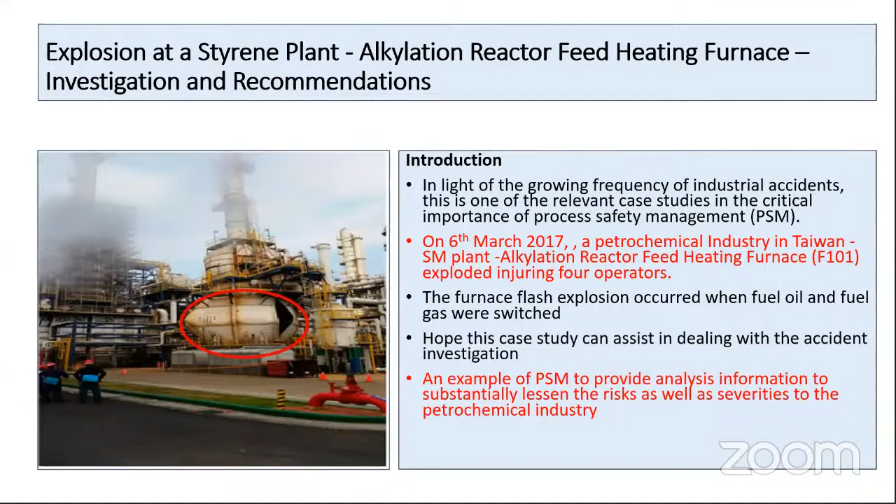Okay, going to the next slide. Process in brief. It is a petrochemical industry. I will go back to the first slide. In the light of growing frequency of industrial accidents, this is one of the relevant case studies in the critical importance of process safety management.

On 6th March 2017, a petrochemical industry in Taiwan, a styrene plant, styrene monomer plant, had its alkylation reactor feed heating furnace explode, injuring 4 operators. The furnace flash explosion occurred when the fuel oil was exchanged with fuel gas, that is, they were switched. Hope this case study can assist in dealing with accident investigation also. It is an example of PSM, to provide analysis information to substantially lessen the risks as well as the severities to petrochemical industries.

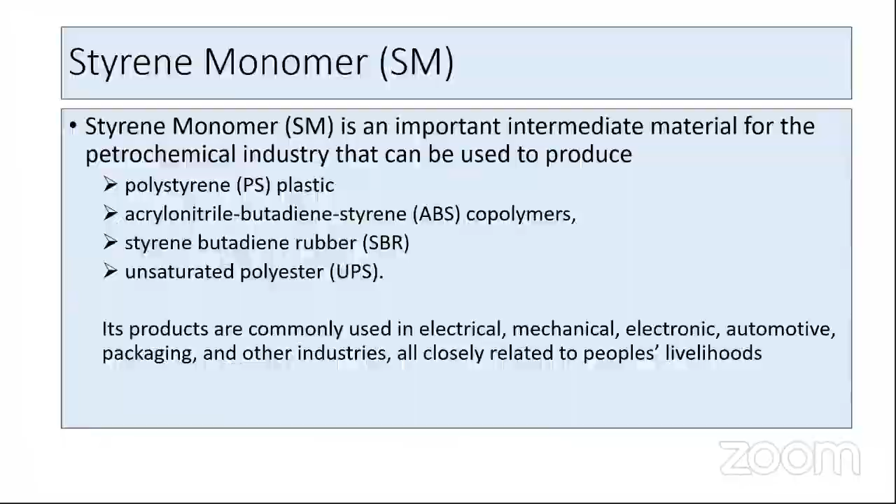Going back to the third slide, fourth slide sir, sorry. Process in brief. Is everybody with me? Yeah. In general, the styrene monomer manufacturing method is based on alkylation of benzene and ethylene.

You can see in this figure, at the bottom right side, there is a reaction between ethylene and benzene. Ethylene on the left extreme and benzene on the right top extreme, they both react in the alkylation reactor to give ethyl benzene. According to the process flow chart, before the raw materials ethylene and benzene enter the alkylation reactor, only benzene must be heated to reach the operating temperature of 700 to 800 degrees or even higher in the feed heating furnace, and then fed to the reactor where ethyl benzene is formed.

That is, ethylene from the left extreme goes to the alkylation reactor, wherein also the benzene is coming to the feed heating furnace. Before coming to the feed heating furnace, it is heated. The heated benzene only can undergo alkylation with ethylene, at around 700 to 800 degrees centigrade. So it is heated in the feed heating furnace, and then fed to the alkylation reactor where ethylene reacts, and it gives ethyl benzene.

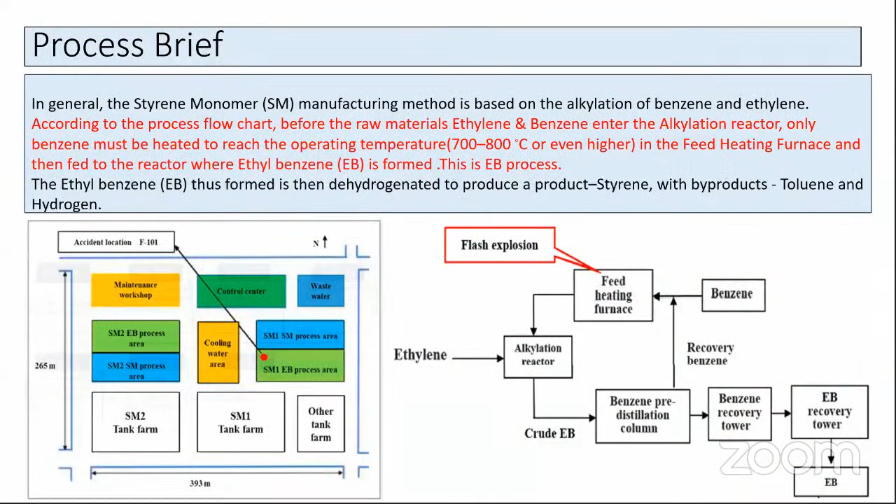So next slide. Accident scene photos. You can see this shell of the furnace cracked. Heating furnace, numbered F101, has been cracked. Next one.

Accident investigation. Some indirect possible reasons are as follows. After the heating furnace explosion, the operator did not shut down F101, the heating furnace, according to the standard operating procedure. Then the atomization of fuel and gas continued in the furnace, resulting in flashover under high temperature.

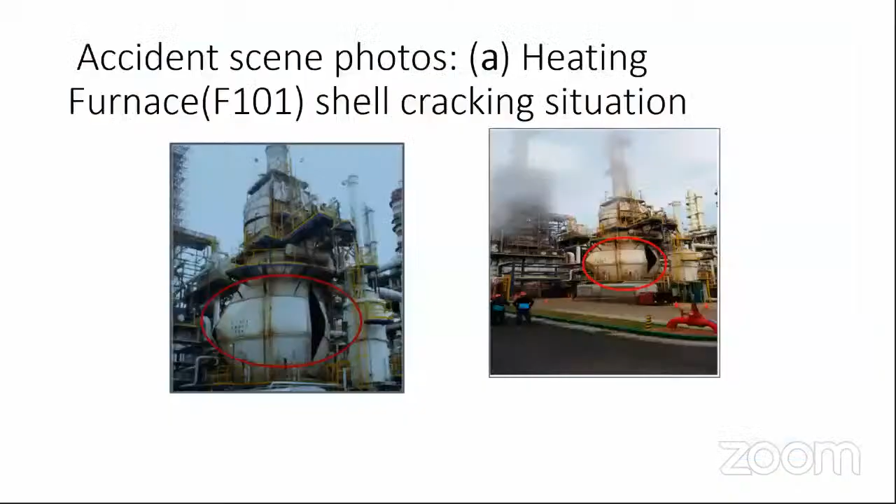I want to explain here. He did not shut down the heating furnace and atomization of the fuel. The fuel was in continuous operation, continuous running, and the furnace was already under heat.

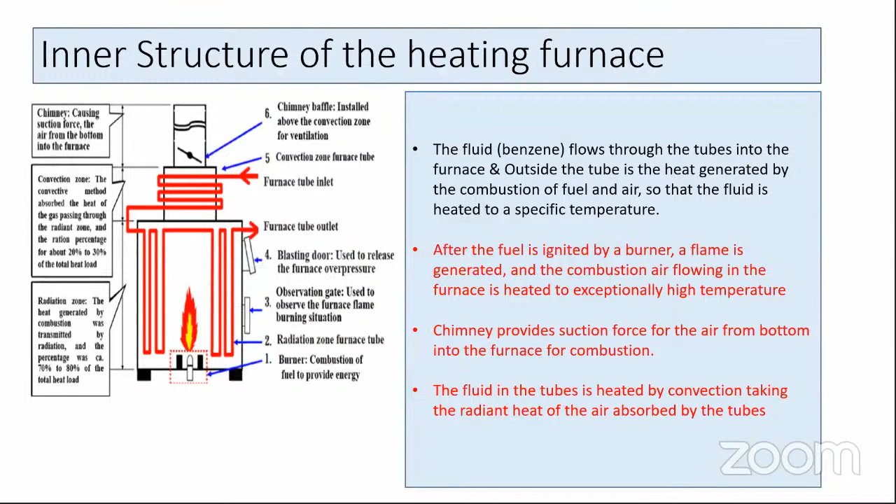During this, I will tell you one thing. From running condition, fuel oil was initially used, and in the running condition itself, he switched over to fuel gas. During this process, while he was using fuel oil, already the furnace surface temperature was very high. Now he switched out to fuel gas.

So the fuel gas is coming from the burner, which was extinguished, or the flame which was extinguished. We have three elements now: the gas coming from the burner nozzle, the heat surface, and the air rushing up because the chimney is open. So we have three elements now coming into the furnace. I'll just read it, and it is enough to cause fire because the concentration is quite enough.

In the fuel adjusting period, the furnace produced black smoke. At this point, on-site staff discovered the flame extinguished and performed the adjustment. Then determined the fuel gasification, meaning fuel is coming, caused the ignition, resulting in other burners' flames extinguishing instantly.

The on-site response time during the abnormal situation was too short, because with the explosion, generally on-site we cannot control the situation. On-site response time was very short, too short.

The blast door vent size was not meeting the requirements. I've shown in the chimney structure that the blast door vent size was not enough to meet the requirements. The pressure will build up and should be vented, and the chimney's nearest opening is the blast door, which can release the pressure. But it was not enough. Since the chimney was opened, it took that route, and the pressure increased and it blasted.

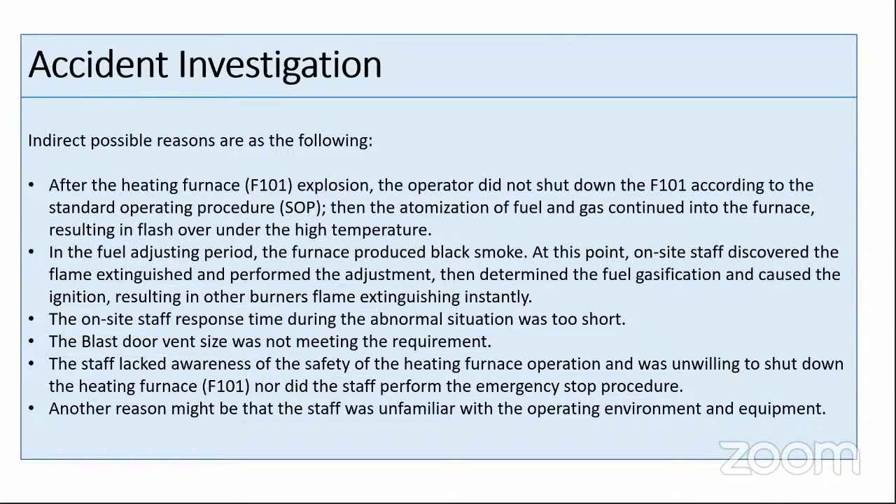Okay, next slide. Accident investigation analysis. We have taken just now an analysis. We have many methods of analysis. Here we have a picture of how accident identification works, so we can identify the cause of accident, and the assessment, control and decision making, like qualitative analysis. The entire thing is a qualitative analysis system, and for risk analysis we have hazard identification.

For hazard identification we can use ALOHA and FTA. ALOHA is software for consequential modeling, and FTA, root cause analysis, is a top-down approach. We can have that also.

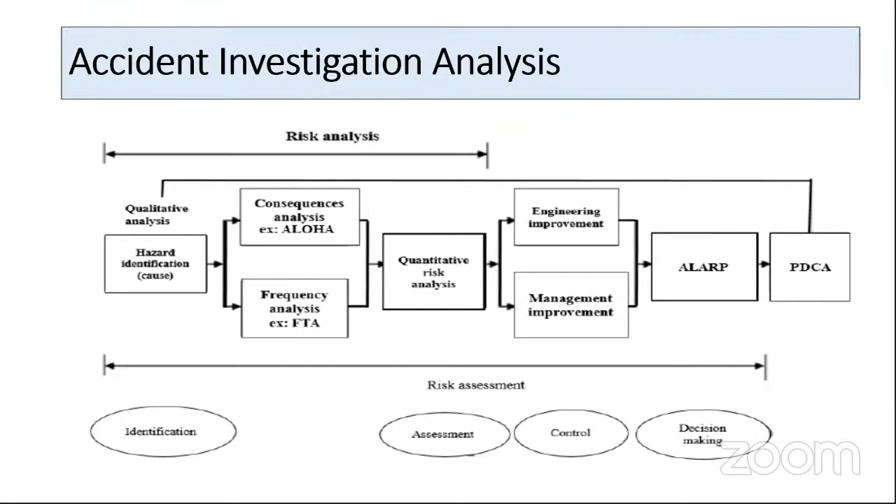And quantitative risk analysis - from hazard identification we can quantify the risks, and we have control systems, engineering controls and management controls. We have decision making, ALARP. Since we go through controls we can get to ALARP, and we have the PDCA cycle: plan, do, check and act. We have the decision making. Next slide, sir.

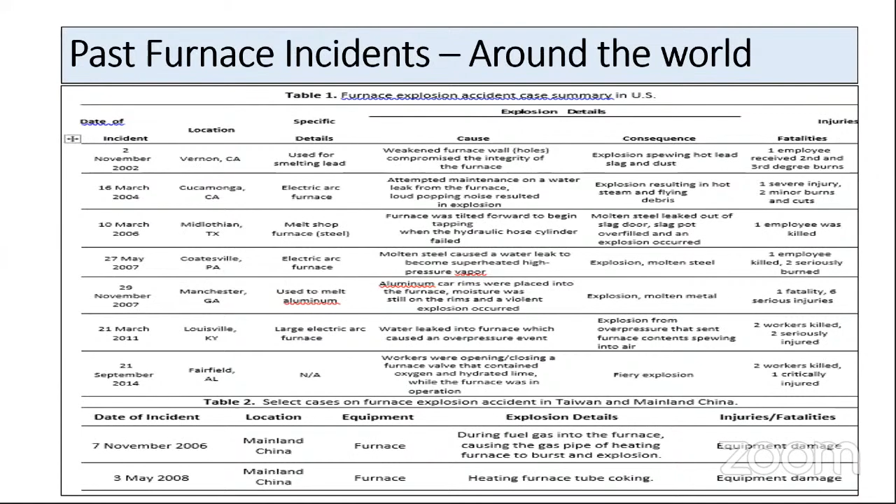I can discuss in the next slide about the causes. It is recognized that accidents of the heating furnace occur intermittently, and common accidents mainly include furnace explosion, coking in furnace, and explosion in the flue.

Causes of accidents: high pressure within the system, human error, improper maintenance or faulty design, or equipment failure.

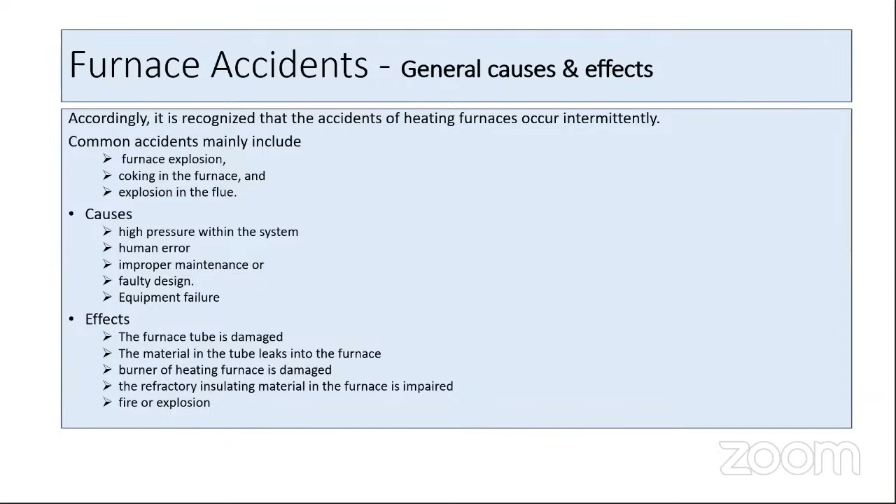Effects: the furnace tube is damaged, the material in the tube leaks into the furnace, the burner of the heating furnace is damaged, refractory insulating material in the furnace is impaired, and fire and explosion occur.

We have used the concept of hazard identification, risk analysis, risk control, and decision making. In hazard identification we already discussed ALOHA and FTA. In risk analysis, qualitative and quantitative methods are used to implement risk assessment, and for risk control we have engineering and management plans leading to decision making.

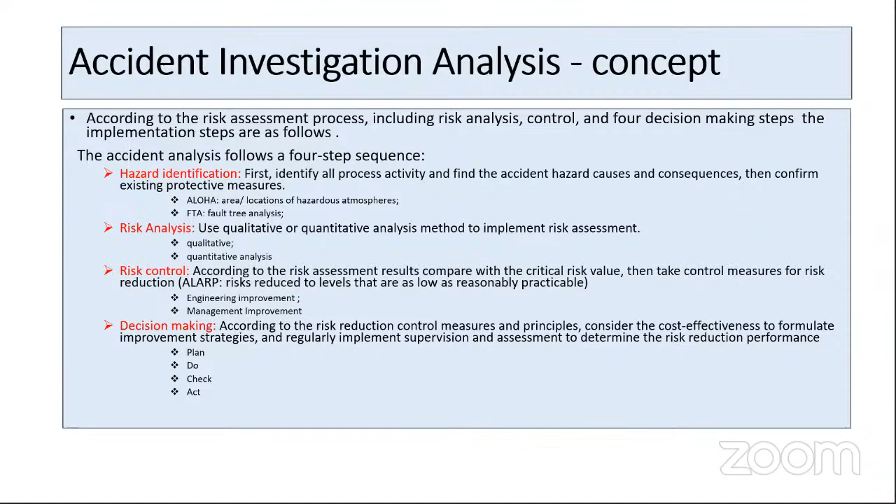For accident investigation analysis, we have Process Hazard Analysis (PHA) elements under PSM. One method is FTA - Fault Tree Analysis, which uses what-if analysis and event tree concepts.

Fault tree analysis was developed by Watson and Mearns at Bell Telephone Laboratories in 1962 in the area of the American telecommunication industry. It was first applied in the aircraft industry for missile failure analysis by the USA, and later NASA, other electronic industries, and software companies also started using it for safety analysis.

FTA is an effective tool widely used to find system reliability, maintainability, failure probability, failure rate and repair rate, and for system safety analysis.

FTA is a top-down approach starting with an undesirable event. You can see in the figure the top event - here, an explosion occurred in the heating furnace. That is the top-down undesirable top event. Below it come the intermediate events, or possible sources.

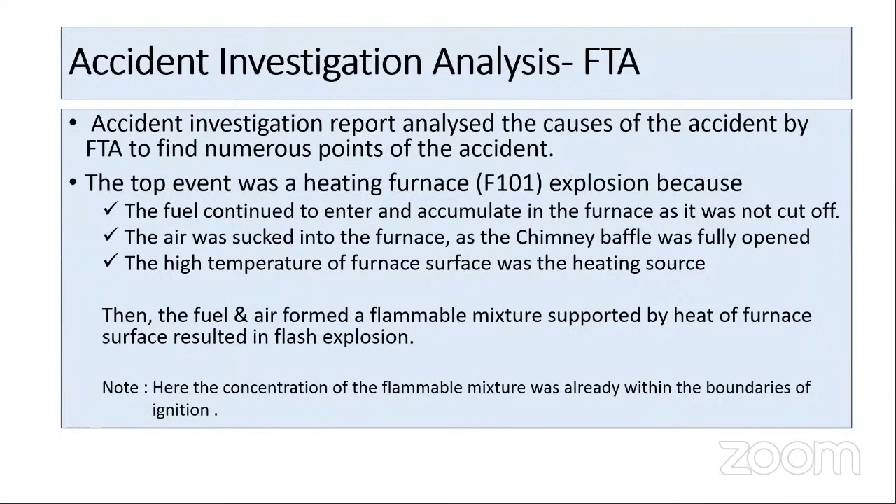See, we have this fault tree. This is taking the heating source, heat, furnace explosion. We have three things here: heating source, air, and excessive combustible materials. So we can draw our fault tree in this manner. We can give names like T is our top event, X1 is X1, X2, X3 are the intermediate events, X4, X5 — all these things I have just given as labels.

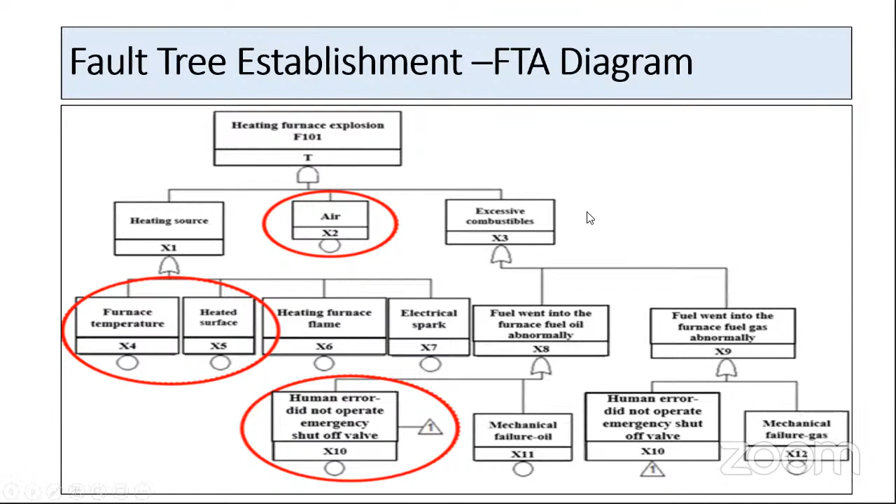Using the basic fire triangle, we have flame, ignition source, oxygen, and fuel. Applying this same principle, we have developed heating elements — heating elements which are furnace temperature. X1 is the heating source, and X4, X5, X6, X7 are the heating sources: furnace temperature, heat surface, heating furnace flame, electric spark. We have taken some possible causes.

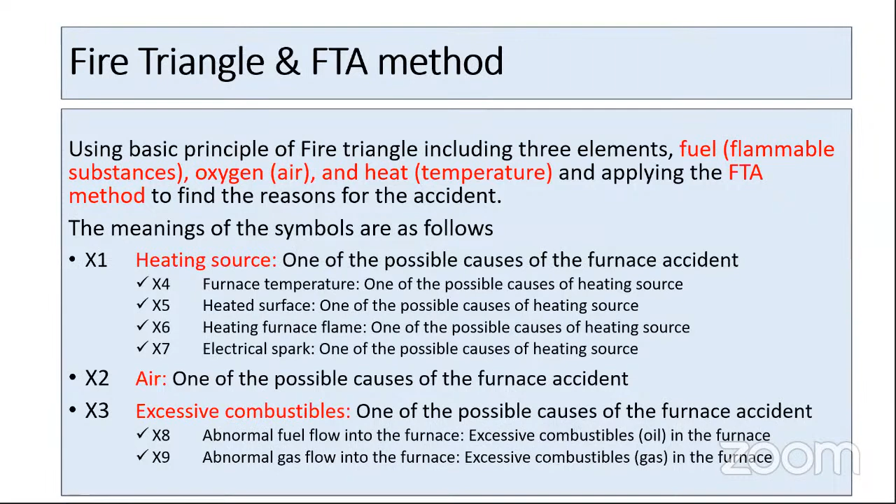X2 is air, X3 is excessive combustibles. So under that, other causes are abnormal fuel flow and abnormal gas flow to the furnace. Next slide, next slide.

X10 is the human error, which is also a possible cause — did not operate emergency. X11 is mechanical failure due to oil. X12 is mechanical failure due to gas. T is the heating furnace explosion, that is the undesired event. So we can see intermediate events and basic events classified under this. So whatever failure, these are the failure events — the intermediate failure events and the basic failure events. So causes, failure causes, or events are one and the same.

So we will form a fault tree, and then we will form some equations. T is equal to X1 — you have seen X1 is the heating source. X2 is the air, and X3 is the excessive combustible.

So we go to the top event, the top undesirable event. We can multiply the probabilities X1, X2, and X3. Then X1 — you can see the basic causes of X1 are X4, X5, X6, and X7. X2 is already air. And X8 and X9 are the excessive combustibles, so instead of X3, we have taken X8 plus X9.

Then T2 can be further classified like this. X2 we have taken on the left, and X4, X5, X6, X7, and X10 we have taken. Now this is taking failures into consideration. We can take two ways: one is air, fuel, and heating sources, or air, fuel, and human errors. We can get the top-down approach either this way or that way.

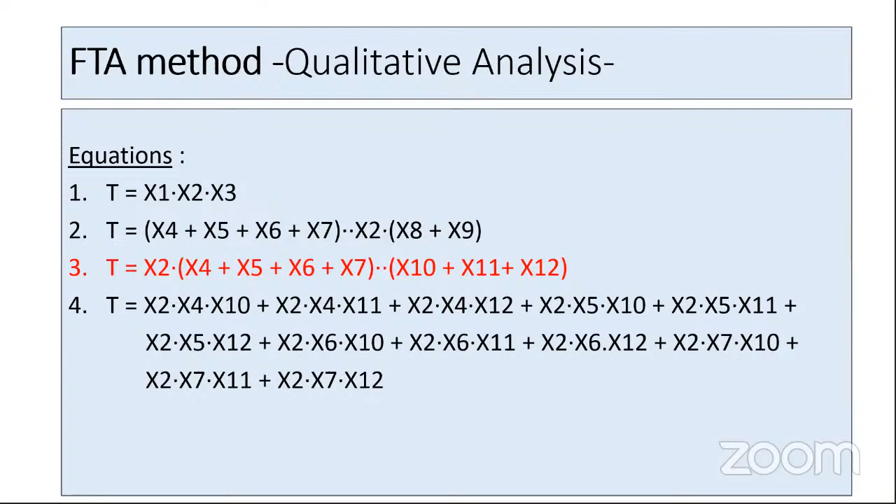So we have taken two equations, 2 and 3, just to remember. And if you multiply all the elements one by one, you get this big equation. Next slide — each element multiplied to each other gives equation 4.

Next slide. So we also have minimum cut sets — this is another method. A minimum cut set is a combination of basic events which could lead to the top event occurring. It cannot be simplified further and still ensure occurrence of the top event. If the MCS is in a failed state, the entire system is out of order.

So like that, in every set we have air — air, heating source, and human error. This is a combination of all these key factors. Now, from the above results, we could find the key factors of the top event are air, any heating source, and human error or mechanical failure.

So in general, an MCS containing only one basic event is likely to cause failure more readily. A minimum cut set with only one basic event will lead to system failure more than an MCS containing two basic events. So if it has more basic events like X2, X4, X10, the chance of explosion will be less.

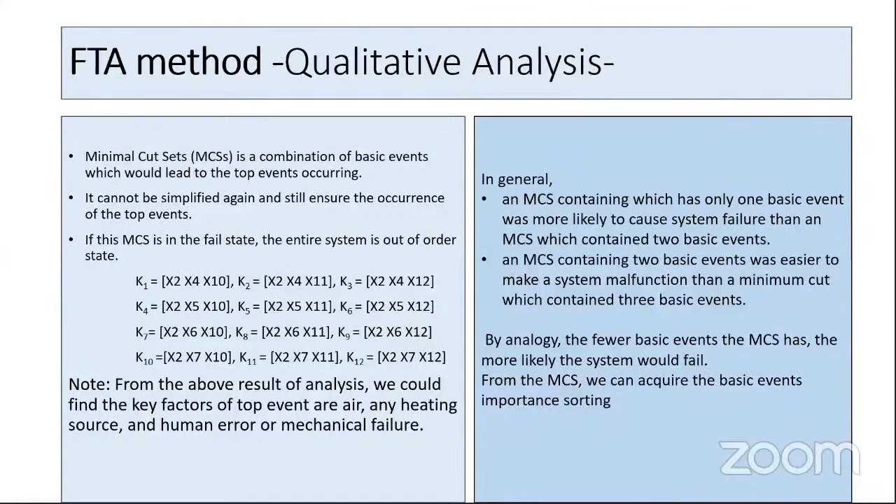But if you have a single basic event, the system failure will be more likely. So an MCS containing two basic events is easier to cause malfunction than one containing three basic events — one basic event causes system failure, two basic events cause malfunction, and so on. So minimum basic events mean less impact, less explosions, less accidents. Next slide, this is a minimum.

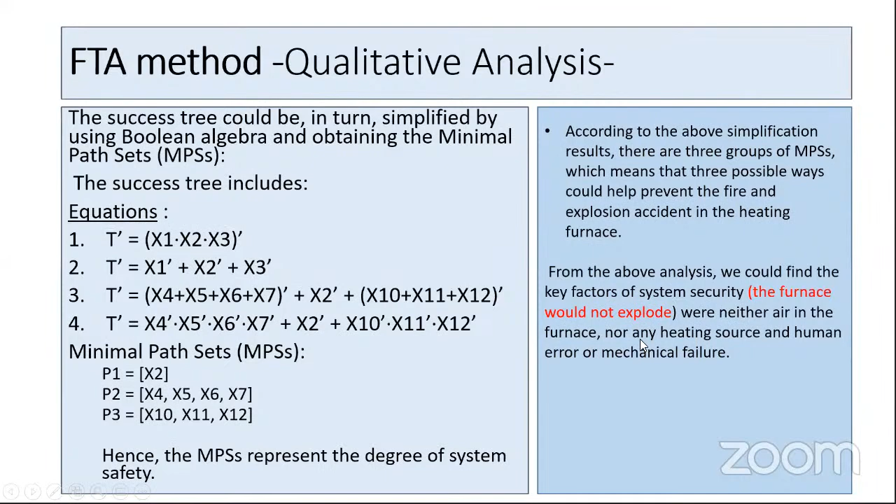Minimum path sets the success rate. This is another MPS method. It is like, if it has a minimum pathway, the furnace will not explode. So if you got a minimum pathway that will not explode, it can be explained now.

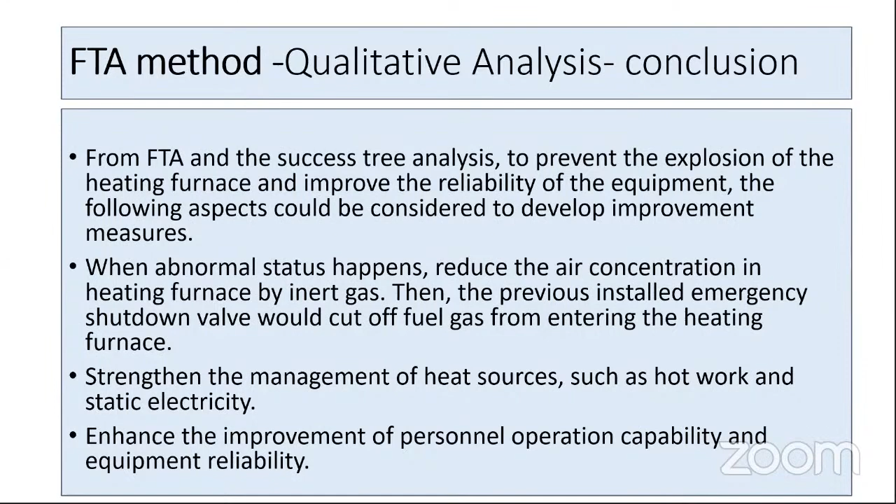We have Aloha also, so we can see the minimum. Aloha is a consequence modeling used to analyze the distance where more impact of explosion can occur. So, next slide.

I think you got to see the resultant analysis. We have learned from this that the fault was caused by high temperature. The explosion occurred due to high temperature sources, mixed flammable gases, and human factors. Human factors are misoperation, misjudgment, unmoved action, lack of training, lack of skill, and so on.

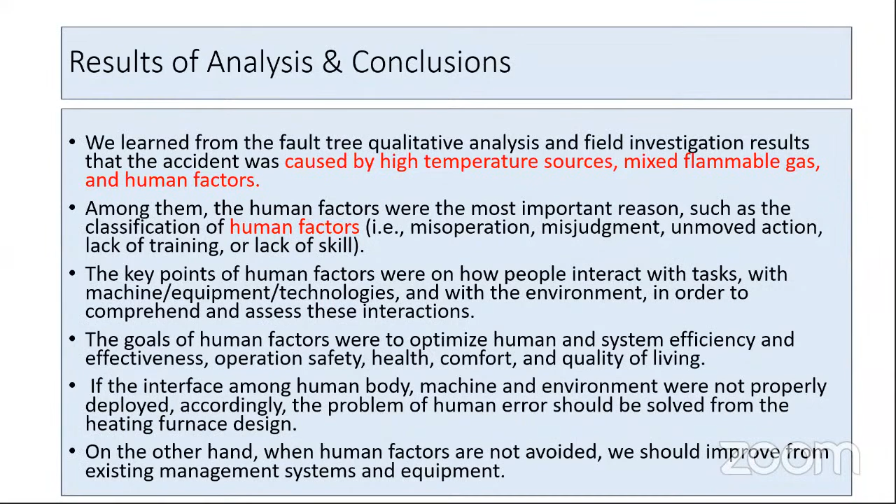So we'll quickly go to the recommendations. The first, units with FTA cost-effective analysis. Through this FTA cost-effective analysis and investigation of the incident, the following recommendations are written.

Units with different specializations must cooperate with each other to investigate accidents and improve the operating safety of the equipment. Inherently safer design and mechanical integrity could be improved. We need to develop procedures of MOC, management of change.

When the heating furnace used different fuels, they should develop MOC procedures to avoid increasing the risk of exchanging fuel. We must use a single fuel instead of multiple fuels.

Operator's ability should be improved, especially during abnormal heating situations, to improve operator training and equipment regular maintenance. Before the heating furnace was opened, PSSR should be done for F101.

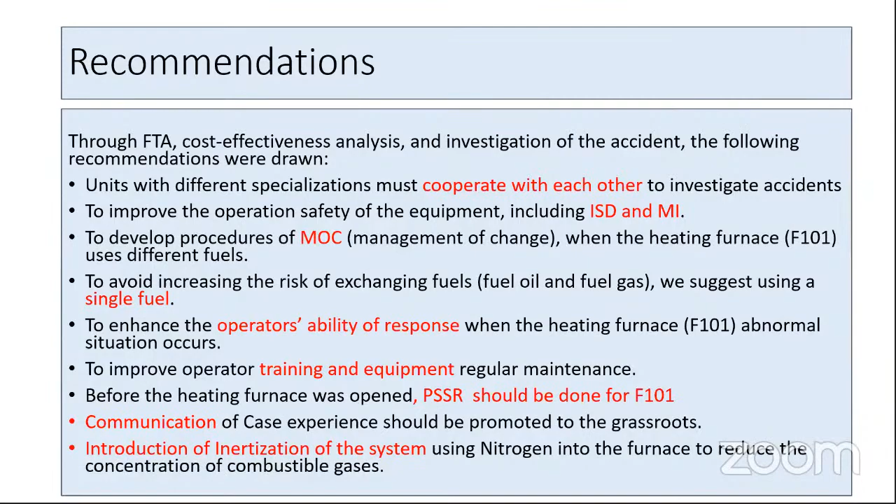Communication of the case experience should be promoted to the grassroots level of every person. Introduction of inertization of the system using nitrogen and other inert gases into the furnace to reduce the concentration of combustible gases. Thank you, sir.

It was a little lengthy. Sorry. Thank you very much, sir, for providing this opportunity.

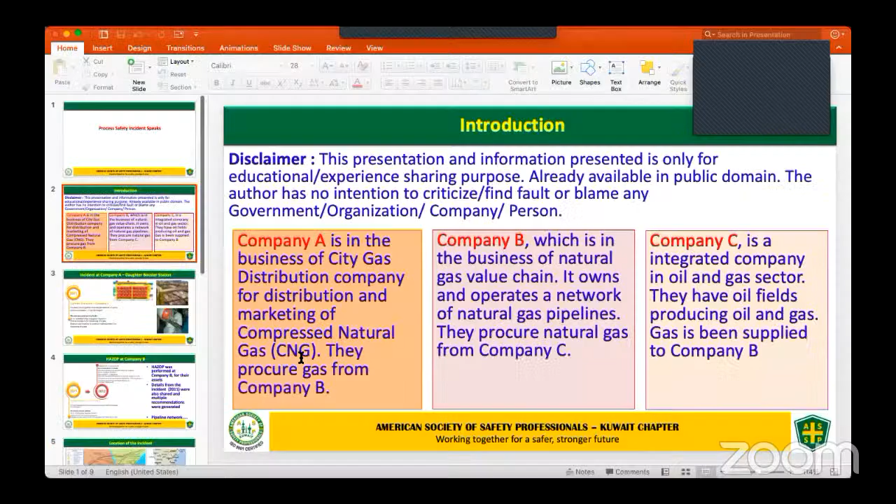Yeah, just give me a second. I think I just shut it down. It's a glitch. Just give me a second, sir.

Good evening, my name is Sridhar, and I hope you are able to listen to me? Yes, sir, yes, sir, carry on.

Wonderful. So what I'm trying to give is an experience which I had when I was working as a consultant. So it's actually about two different incidents, but they're all interrelated, and I'd just like to share about how things are.

The first and foremost thing is this presentation and information which is being presented is only for the purpose of education and experience sharing. So I don't want to quote anything, or say anything otherwise. This is not a place where I'm trying to blame anyone or any organization per se.

So let's look at it as three different companies. One is company A, which is in the business of a city gas distribution company marketing CNG, and they are selling it out in southern India. Company B is in the business of natural gas value chain, it owns and operates a large network of pipelines and its associated assets. Company C is an integrated oil company with oil fields, and from there they are supplying the gas to company B, which goes back to company A.

So this is an incident which happened in company A. There was a cylinder explosion. These cylinders were used as a part of the value chain where CNG is being filled up, and it is being sent out to other places where they use these CNGs to be filled up in CNG filling stations for vehicles, cars, and autos.

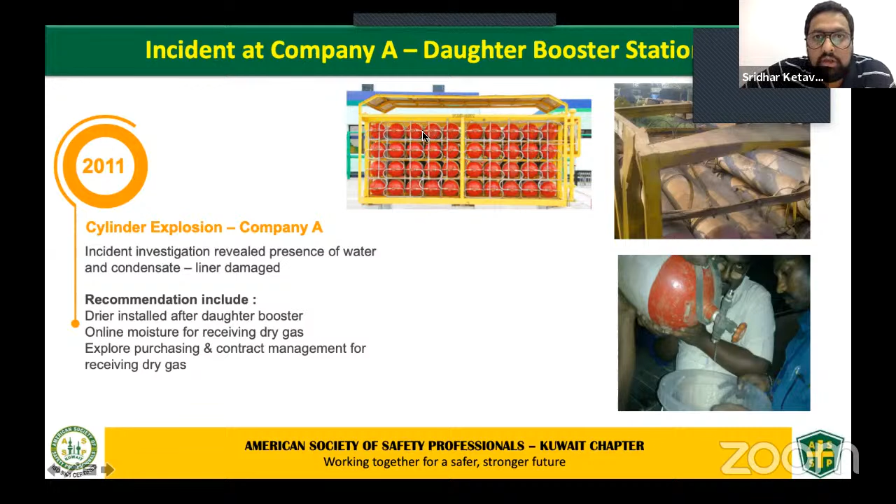So you're able to see the cylinders which are stacked. Can I just have a feedback, please? Yes, you could see, yeah, perfect. So these cylinders are basically the banks. When we have cylinder banks, you have the high bank and a low bank. This is exactly from the company's website which I had taken, so you can see that.

On the right side, you can see that one of the cylinders had an explosion, and the top part of the beam was also damaged, and it flew up for some height, and then it just fell off. So then we were called in for doing an incident investigation.

So during the incident investigation, we found that... anything? I'm sorry. Yeah, so anyhow, when we were trying to do the incident investigation, we found that there's a lot of condensate and water in the cylinders, which has been depicted in the other photo which is there.

Eventually, the recommendations which came out were to install a dryer after the daughter booster. So the gas comes in from the booster station, and then there's a daughter booster which increases the pressure of the compressed natural gas, and then we wanted to have a dryer. We also suggested an online moisture monitor for the receiving of dry gas, and to explore purchasing and contract management, because company A was always telling that company B is giving us wet gas. This is an incident which happened in 2011.

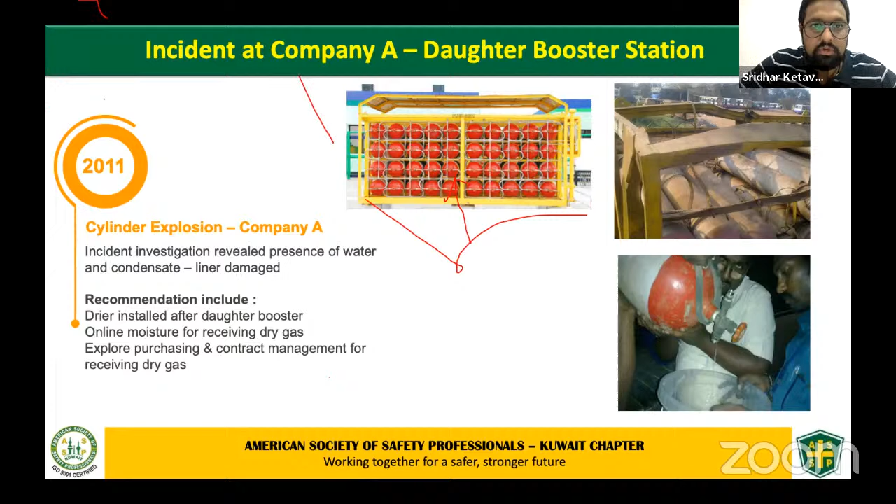Following that, what happened was, we went to do a Hazop for company B. So company B, actually, when we were doing Hazop, that was in 2012, where we performed it for their entire assets. During the Hazop, I had actually shared, because I was the chairman for the Hazop, the information about what happened in 2011, for company B.

And eventually what happened is we came out with Hazop recommendations: to enhance the separation system at the company or supplier, have an online analyzer, develop SOPs for some items, consider frequency of periodic inspection and maintenance to ensure operability of the equipment, and ensure corrosion monitoring is also there.

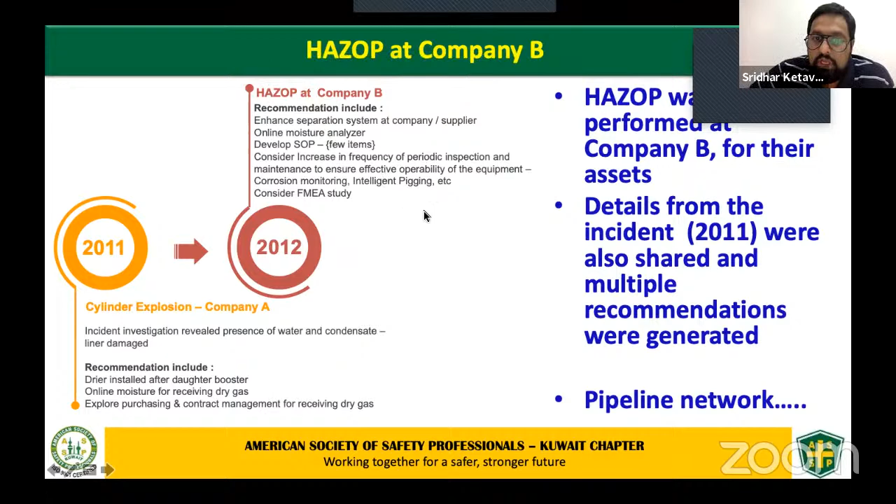So what happened in 2014 was there was a major incident with an underground pipeline for company B, and there were about 23 fatalities and around 38 injuries. There was a significant amount of asset damage. Following such an incident, obviously government intervention comes up, and the government started to investigate the issue.

I'll just play you a small video so that you can understand it a little better.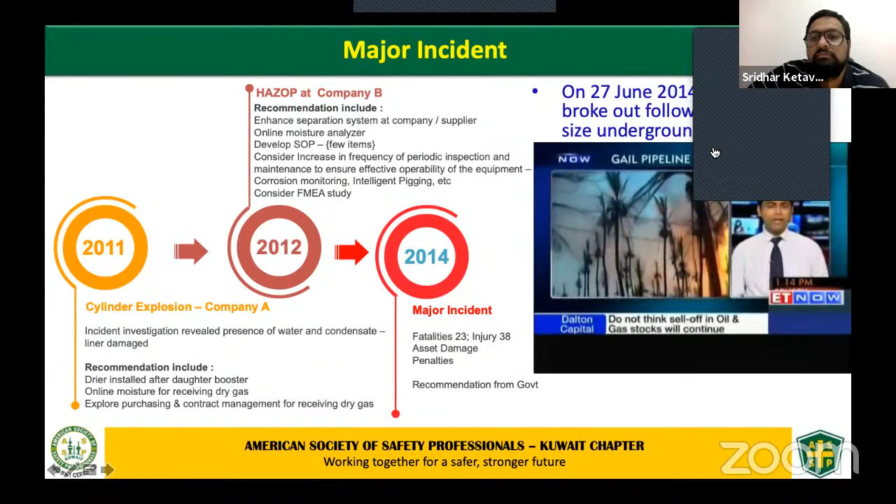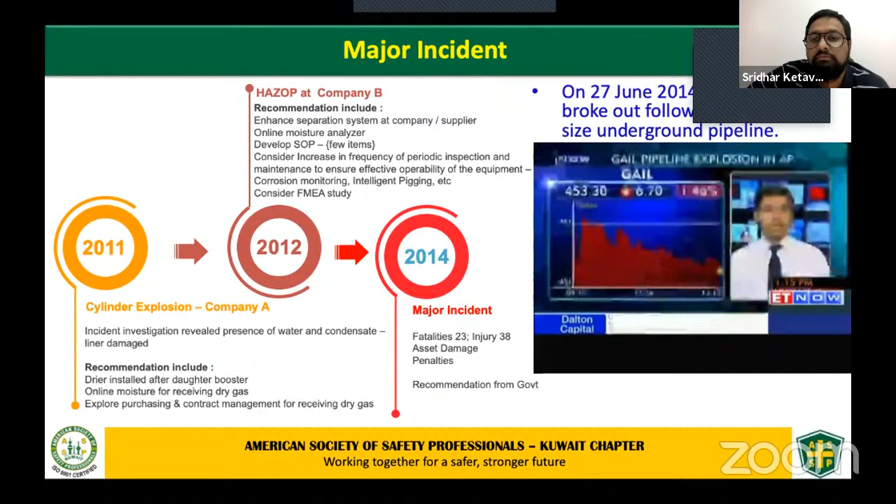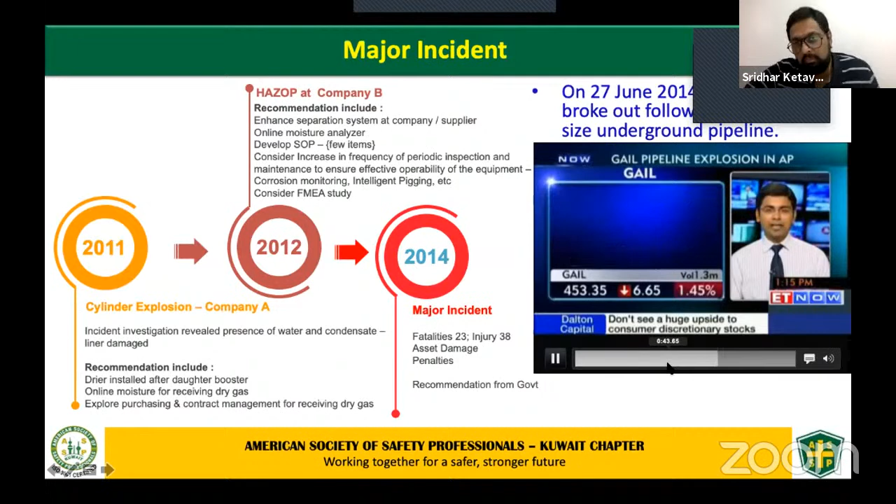An unfortunate incident, explosion in a GAIL-operated pipeline in Andhra Pradesh prompts ONGC to shut down 2 gas fields. Yatin's got details. Sad news - the death toll has reached almost 14 people in Andhra Pradesh. News reports suggest the fire broke out from GAIL's pipeline, which was old and rusted, near ONGC's Tatipaka refinery in Andhra Pradesh. Because of that, GAIL's operations carrying gas from ONGC's field have been disrupted, and ONGC's refinery has also been disrupted. This pipeline, operated by GAIL, also used to carry gas to Lanco Infrastructure's power plant, a gas-based power project, so that is also getting impacted. Totally three companies getting impacted: Lanco, ONGC and GAIL. The Prime Minister also tweeted on this unfortunate event, indicating a high-level committee or inquiry commission would be set up to evaluate the incident. The oil and gas minister also spoke on the issue to the press.

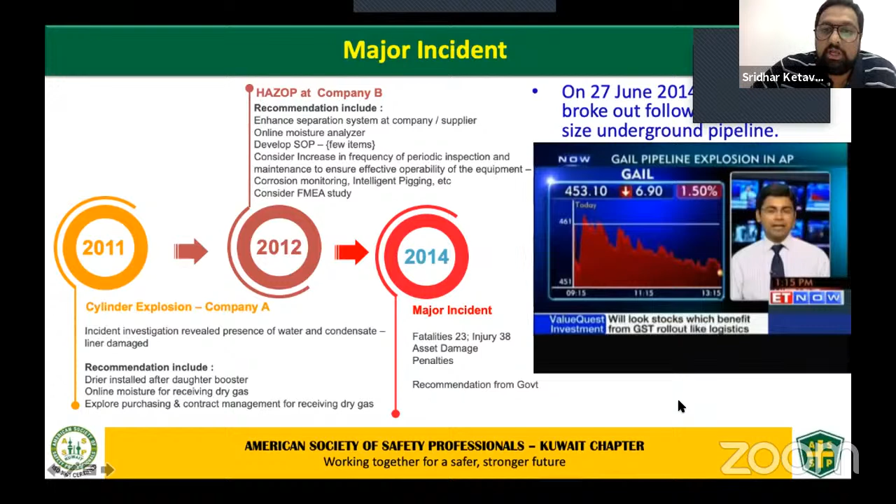But eventually the PNGRB investigation report came out in 2015, and this report was clearly replicating most of the recommendations which were done in the Hazop - that the pipeline was actually transporting wet gas. The company had also flouted a declaration that things were much better and they were not providing a gas dehydration unit. Following that, they said they could not give fitness for purpose for the entire network.

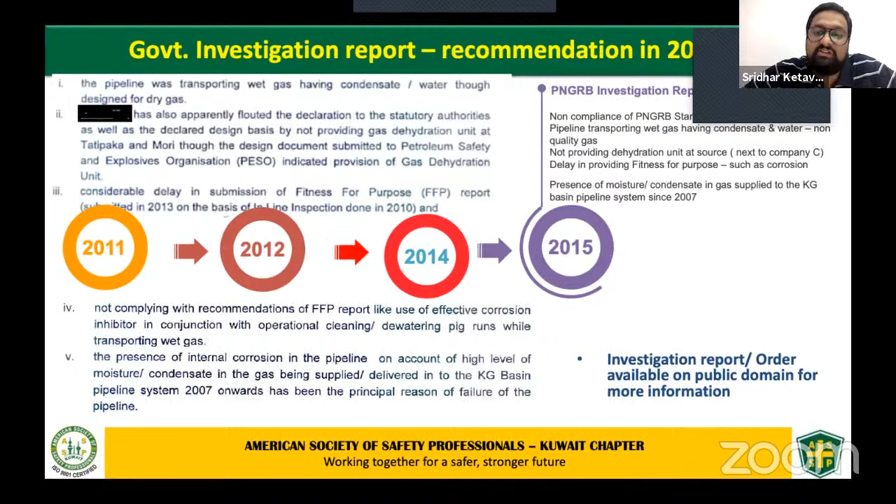And such as corrosion - there was internal corrosion present in the entire pipeline network. The presence of moisture and condensate coming up from the wells was actually being transported, and this had led to corrosion and other things. This investigation report and other information are available in public domain if you need more information.

So I'm sharing this as an experience because something which happened in 2011 was highlighted in 2012. They were also aware and understood many things, and were in the process of putting up a new pipeline and new setup, and doing their best. But again, there are n number of things which come in when looking at such a large network issue. In 2014, the incident happened.

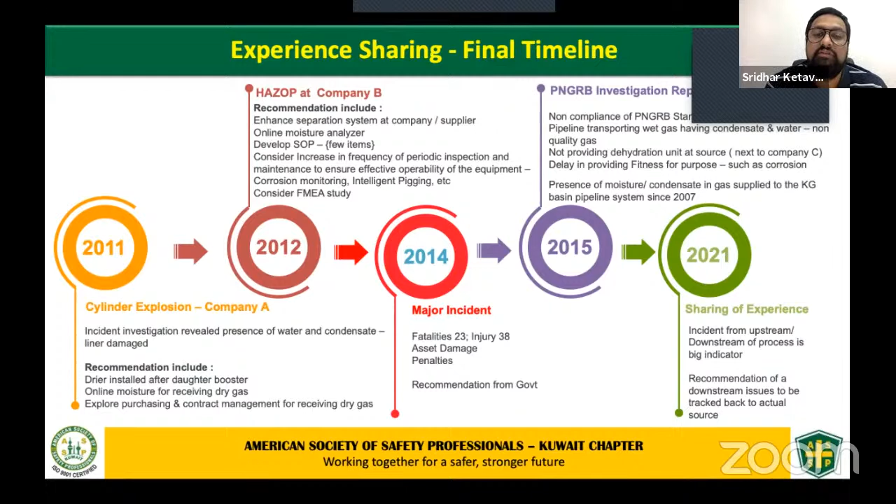In 2015, the report came. Now I'm just trying to say that an incident which happens either upstream or downstream is always a big indicator. This should be considered as a key important aspect to evaluate, and anything has to be tracked back to the actual source. If the source issues had been cut out, then many issues could have been avoided, which includes loss of life and safeguards of assets and so on. So this is what I just wanted to share.